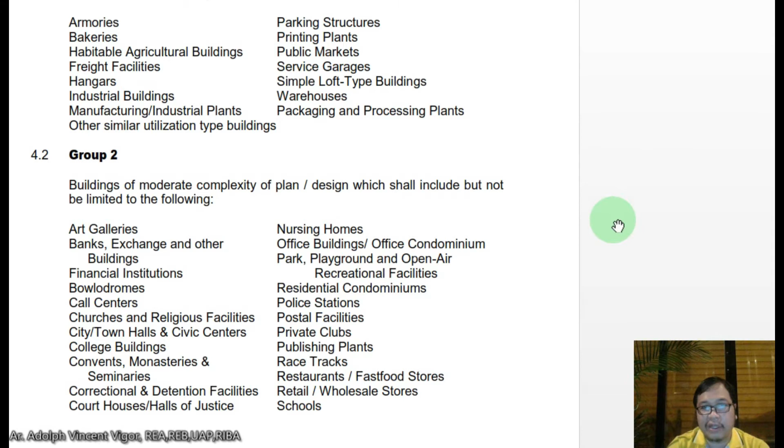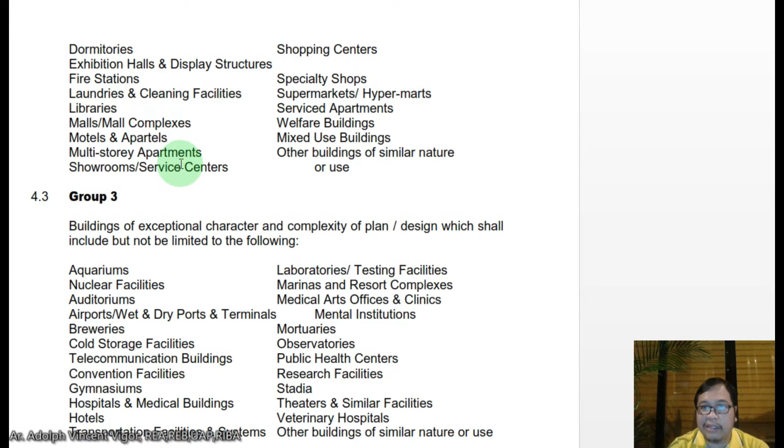Always remember group 1 is simple, group 2 is moderate. Let's move into group 3. You still have dormitories for group 2, exhibition, fire stations, libraries, malls, motels, multi-story apartments, shopping centers, shops, mixed-use buildings and welfare buildings, and other buildings of similar nature or use.

Now group 3 are buildings of exceptional character and complexity of plan and design, which shall include but not limited to the following: aquariums, nuclear facilities. If you're an architect and you already got involved in a nuclear facility project, that means you're really very good in terms of the technical aspects of architecture and engineering.

We have auditoriums, airports, breweries, cold storage facilities, telecommunications buildings, convention facilities, gymnasiums, hospitals, hotels, transport facilities, laboratories, marinas, medical offices, mortuaries, observatories, public health centers, research facilities, stadia, theaters, veterinary buildings, veterinary hospitals, and other buildings of similar use or nature.

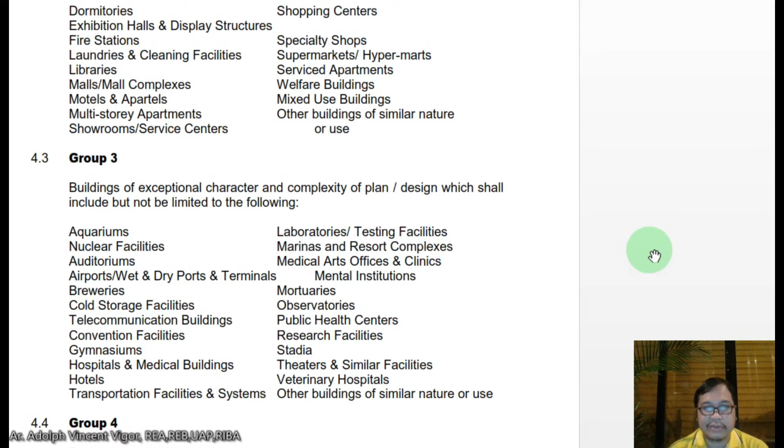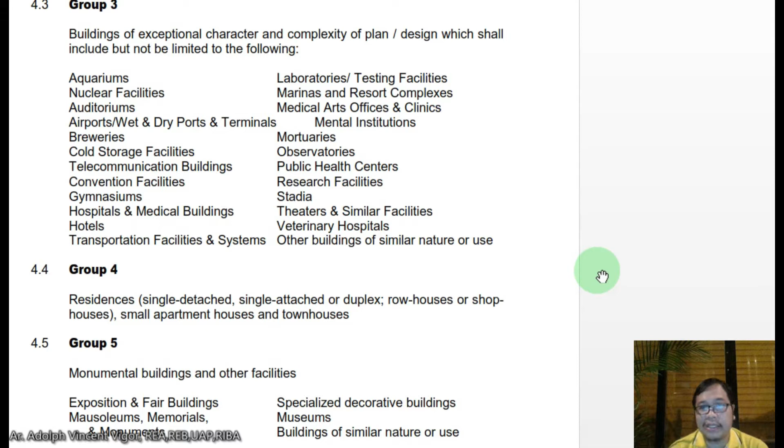Group 4 are your residences: single detached, single attached or duplex, row houses or shop houses, small apartment houses, and townhouses.

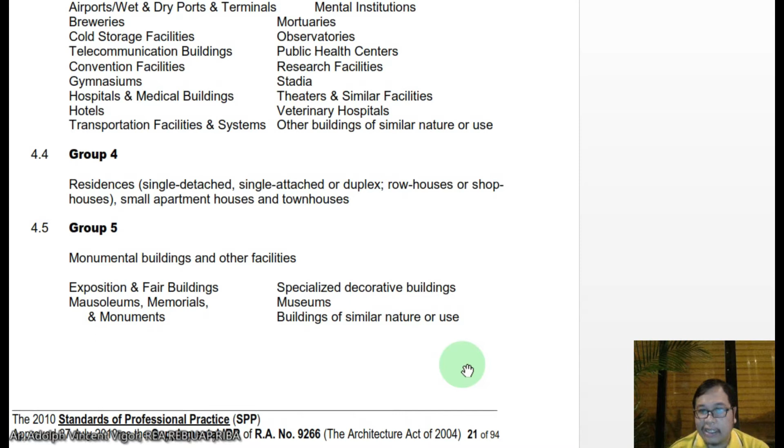We have group 5, which are the monumental buildings and other facilities such as exposition and fair buildings, mausoleums, memorials, monuments, specialized decorative buildings, museums, and buildings of similar nature or use.

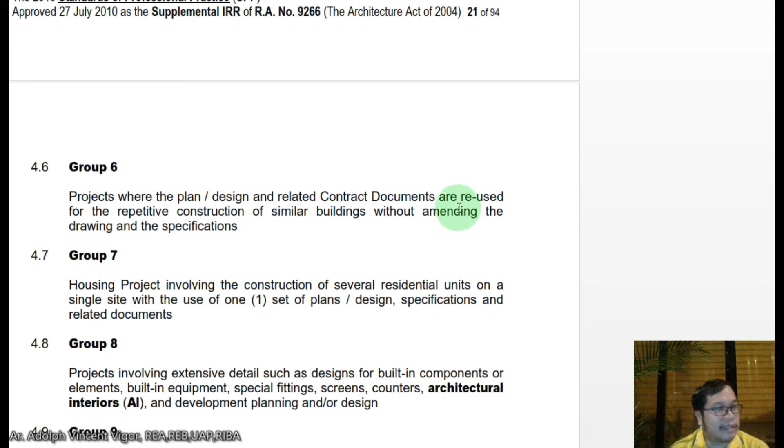We have group 6, which are projects where the plan, design, and related contract documents are reused for the repetitive construction of similar buildings without amending the drawings and specifications. There are cases like this, class, when your plan and design and also the related contract documents are used repeatedly in different sites.

Then we have group 7, for housing projects, which involves the construction of several residential units on a single site with the use of one set of plans, design specifications, and related documents.

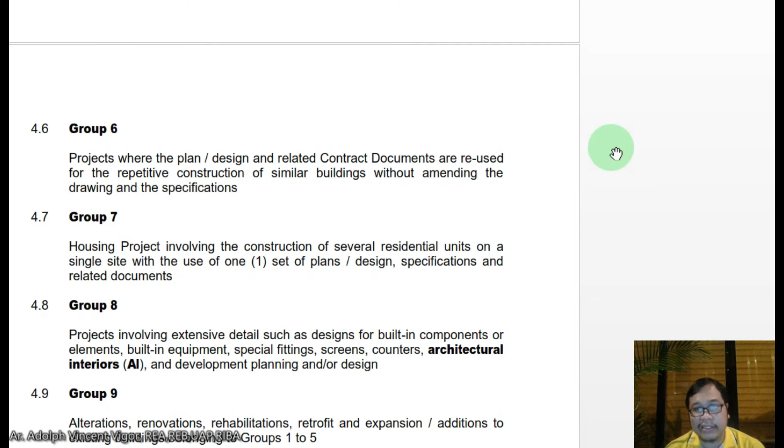We have group 8, which are projects involving extensive detailing such as designs for built-in components or elements, special fittings, screens, counters, architectural interiors, and development, planning, and/or design.

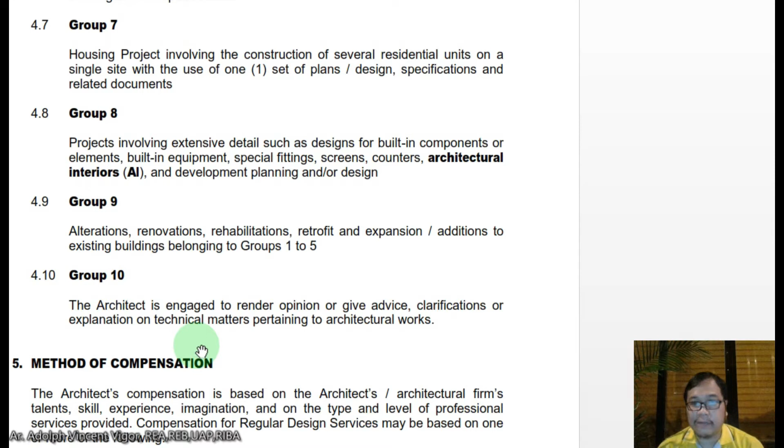You have group 9, which is alterations, renovations, rehabilitations, retrofit and expansion, additions to existing buildings belonging to groups 1 to 5. And group 10, which is opinion or advice, clarifications, or explanations on technical matters pertaining to architectural works.

Okay, now that we are done with that, let's move on to the method of compensation. Compensation is based on the architect's or architectural firm's talents, skills, experience, imagination, and on the type and level of professional services provided. So compensation for regular design services may be based on one or more of the following.

So why is it that there's this statement that our compensation is based on your experience, skills, imagination, talent, and the type and level of professional services provided? From my experience, class, in your first 10 years you really have to build a very strong portfolio. You need to expose yourself to different project types.

You need to move out of your comfort zone. That means you should experience not only doing residential buildings but other project types as well. It would be good for you once you get your license to not only focus here in Cagayan de Oro but move to bigger cities as well, so that you can experience how they build and how they design their buildings.

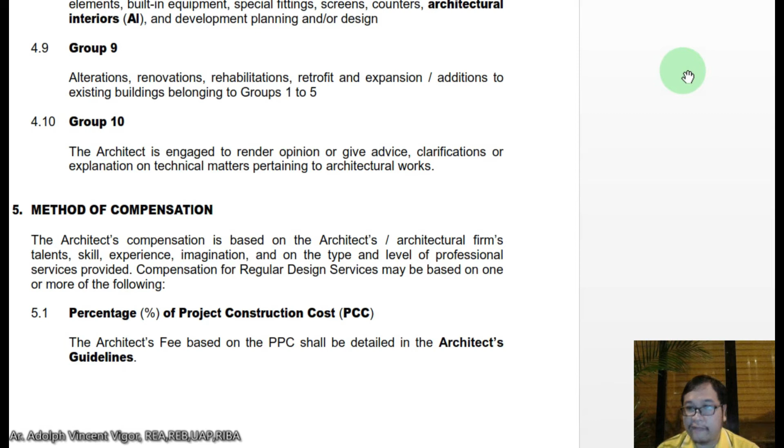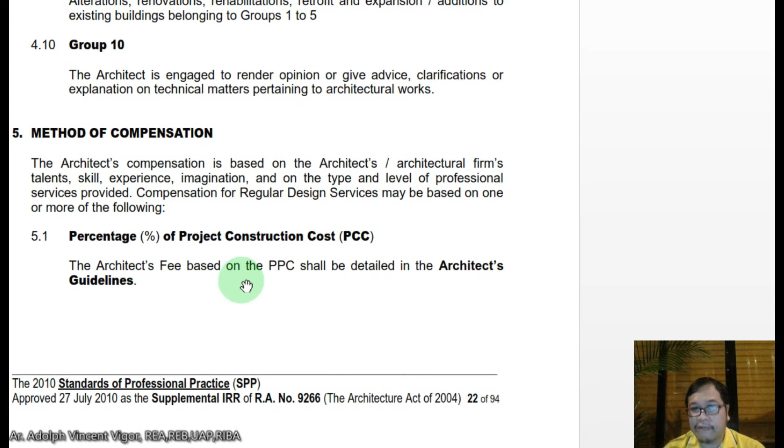So the methods of compensation: the first one is the percentage of project construction cost. The architect's fee based on the PPC shall be detailed in the architect's guidelines.

Then we have the multiple of direct personnel expenses. This cost-based method of compensation is applicable to non-creative works such as accounting, secretarial research, data gathering, preparation of reports, and the like. This method is based on technical hours spent and does not account for creative work, since the value of creative design cannot be measured by the length of time the designer spent on his work.

The computation is made by adding all costs of technical services, man-hours times rate, then multiplying it by a multiplier to cover overhead and profit. The multiplier ranges from 1.5 to 2.5, depending on the office setup, overhead, experience of the architect, and the complexity of the project.

Other items such as cost of transportation, living and housing allowances of foreign consultants, out-of-town living and housing allowances of local consultants, and the like are all to be charged to the client.

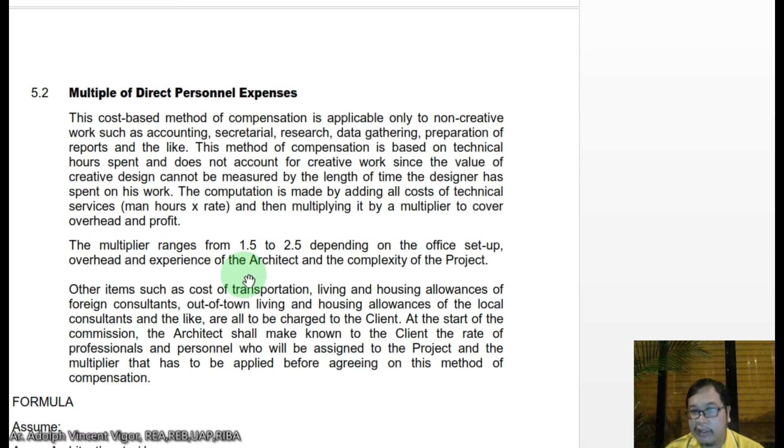At the start of the commission, the architect shall make known to the client the rate of professionals and personnel who will be assigned to the project, and the multiplier that has to be applied, before agreeing on the method of compensation. So this is the formula.

Assuming that A is equal to the architect's rate per hour, C is the consultant's rate per hour, and T is the rate per hour of technical staff, researchers, and others involved in the project. AN, CN, TN is the number of hours spent by the architect, consultants, and technical staff.

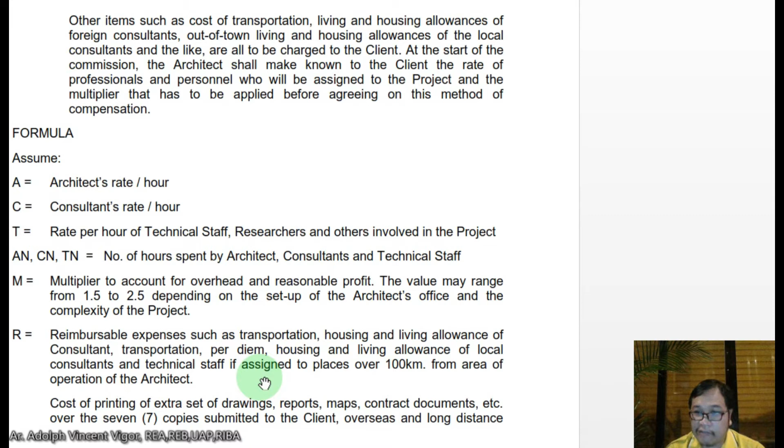M is the multiplier, 1.5 to 2.5, and R is the reimbursable expenses such as transportation, housing, living allowance of consultants, transportation per diem, housing and living allowance of local consultants, technical staff assigned to places over 100 kilometers from the area of operation of the architect.

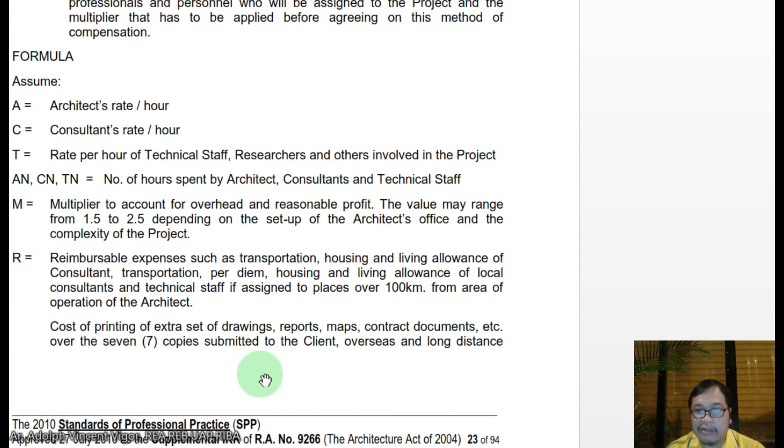So the cost of printing extra sets of drawings, reports, maps, contract documents over the 7 copies submitted to the client, overseas and long distance calls, technical and laboratory tests, licenses, fees, taxes, and similar cost items related to the project.

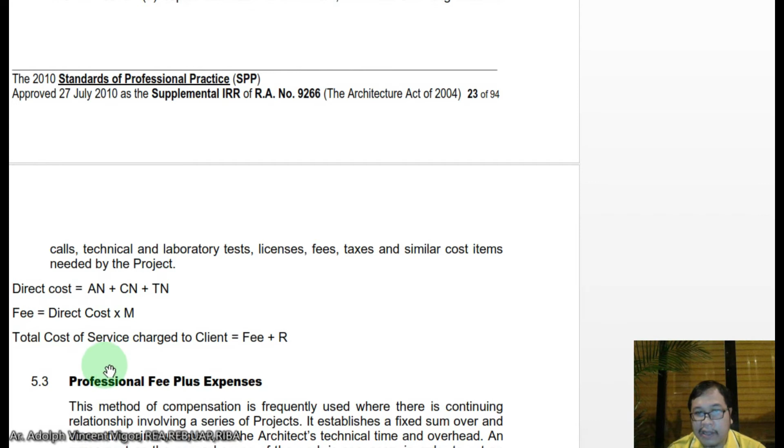So the direct cost is AN plus CN plus TN. Then the fee is the direct cost multiplied by M, the multiplier. The total cost of service to the client is equal to the fee plus R. Then you also have the professional fee plus expenses.

This method of compensation is frequently used where there is a continuing relationship involving a series of projects. It establishes a fixed sum over and above the reimbursement for the architect's technical time and overhead. An agreement on the general scope of the work is necessary in order to set an equitable fee.

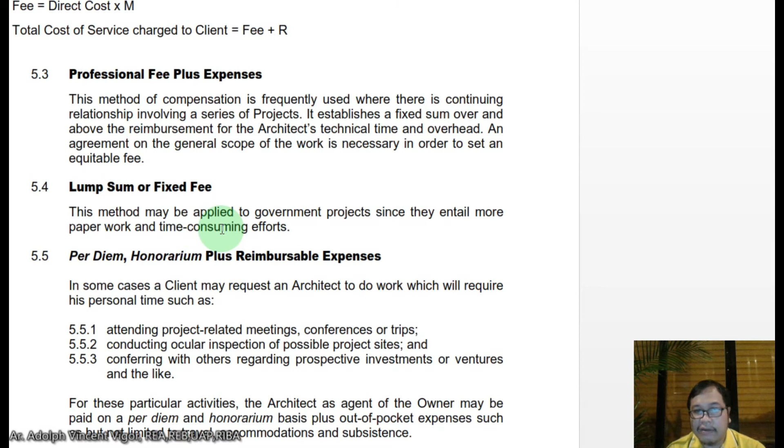Then you have the lump sum or fixed fee. This method may be applied to government projects since they entail more paperwork and time-consuming efforts.

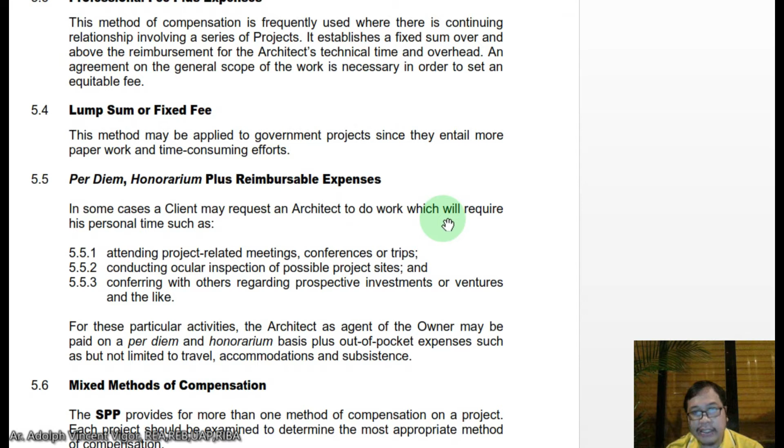You have the per diem, honorarium, plus reimbursable expenses. In some cases, a client may request an architect to do work requiring his personal time, such as attending project-related meetings, conducting ocular inspections, conferring with others regarding prospective investments or ventures, and the like. For these activities, the architect, as agent of the owner, may be paid on a per diem and honorarium basis plus out-of-pocket expenses such as, but not limited to, travel, accommodations, and subsistence.

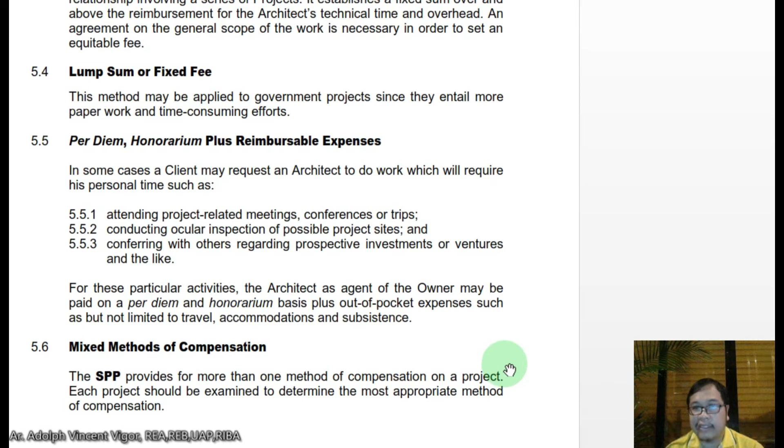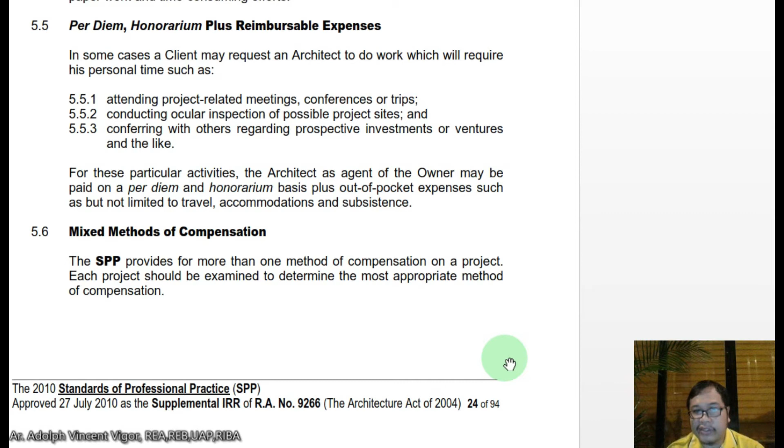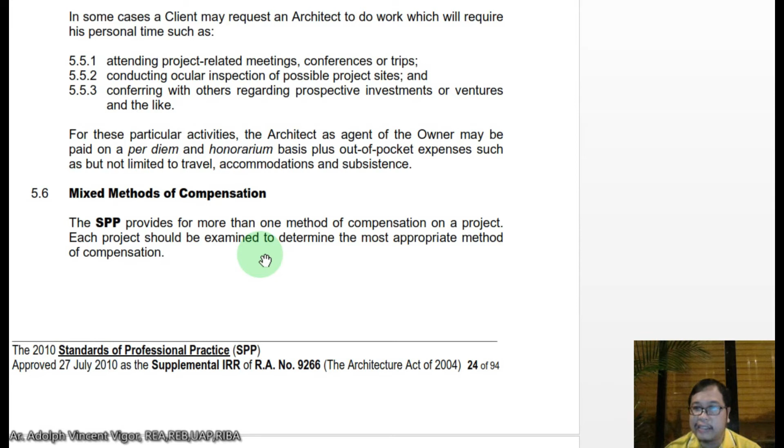Then we also have the mixed method of compensation. The SPP provides more than one method of compensation per project, so each project should be examined to determine the most appropriate method of compensation. It's really up to you, class, on the type of compensation for a certain project. You can mix these things, whatever you think is equitable for you, and whatever the client will agree upon.

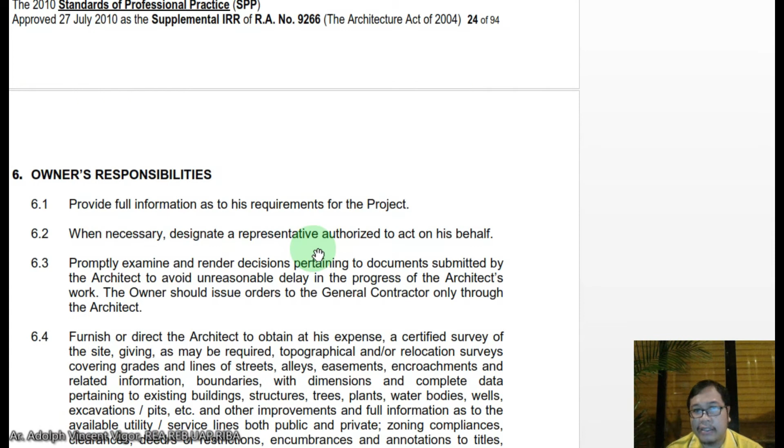These are the owner's responsibilities: to provide full information on the requirements of the project; when necessary, designate a representative authorized to act on its behalf; promptly examine or decide on documents submitted by the architect to avoid unreasonable delay in the progress of the architect's work; and the owner should issue orders to the general contractor only through the architect.

So this clause, the owner's responsibilities, please familiarize yourselves with it and include it in your service contracts with the owner, and explain to them what their responsibilities are as well.

Furnish or direct the architect to obtain at his expense a certified survey of the site as may be required, topographical and relocation surveys covering grades and lines of streets, alleys, easements, encroachments, and related information, boundaries with dimensions, and complete data pertaining to existing buildings, structures, trees, plants, water bodies, wells, excavations, pits, etc., and other improvements, and full information as to the available utility service lines, both public and private, zoning compliances, clearances, deeds of restrictions, encumbrances, and annotations to the titles, association guidelines and standards, and soil investigations, tests, borings and test pits necessary to determine soil and subsoil conditions.

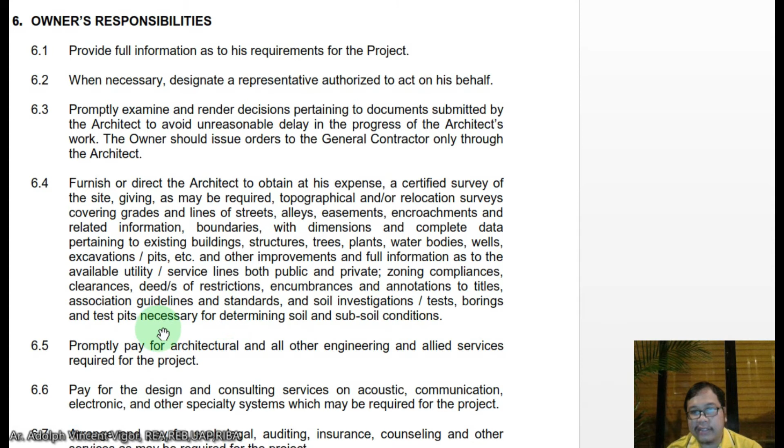Promptly pay for architectural and all other engineering and allied services required for the project, pay for the design and consulting services on acoustic, communication, electronic, and other specialty systems which may be required for the project, arrange and pay for such legal, auditing, insurance, counseling, and other services as may be required, pay for all reimbursable expenses incurred as called for in Section 7, and all taxes including VAT but not including income tax that the government may impose on the architect as a result of services rendered, whether performed as a natural person, an individual practitioner, or as a juridical entity, sole proprietorship, partnership, or corporation.

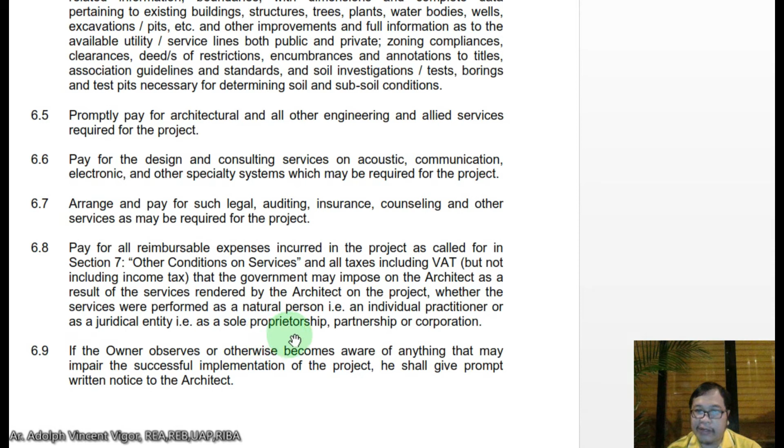And if the owner observes or otherwise becomes aware of anything that may impair the successful implementation of the project, he shall give prompt written notice to the architect.

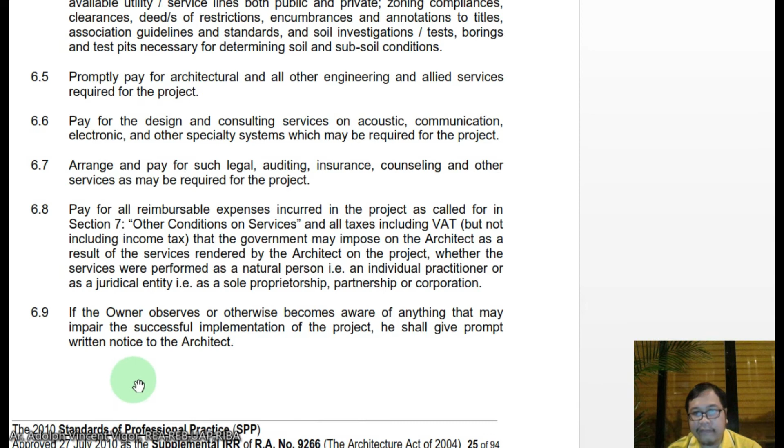Okay, so the other conditions on services. The conditions for the architect's fee are that the architect's fee is based on the project construction cost, and where the architect has to render additional services, additional compensation shall be required.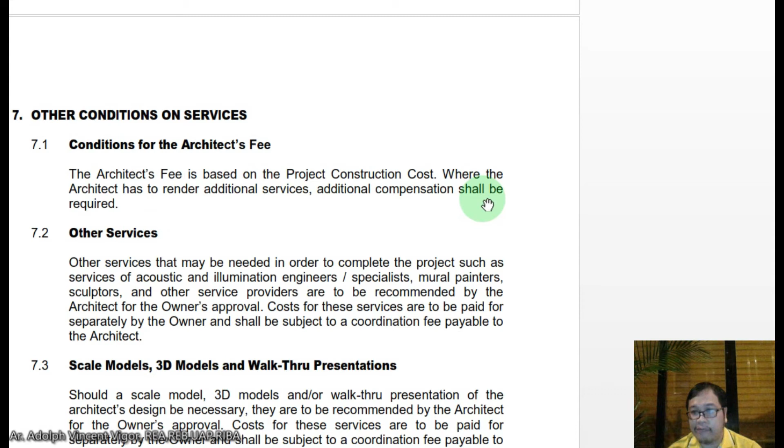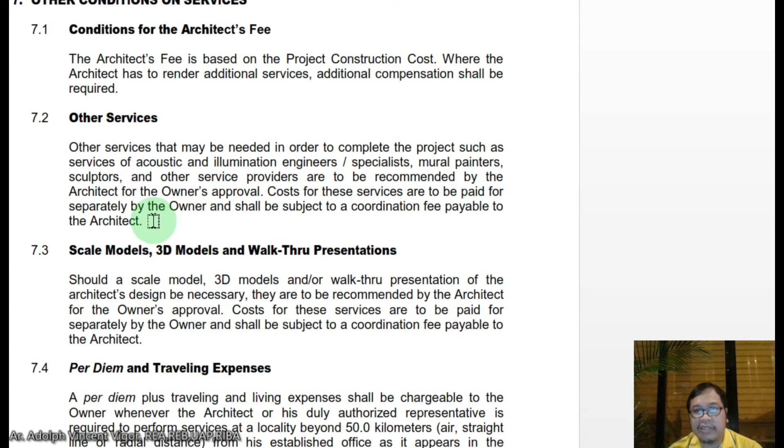Other services may be needed to complete the project, such as services of acoustic and illumination engineers, specialists, mural painters, sculptors, and other service providers, to be recommended by the architect for the owner's approval. Costs for these services are to be paid for separately by the owner and shall be subject to a coordination fee payable to the architect.

Scale models, 3D models, and walkthrough presentations. Should the scale model, 3D model, and/or walkthrough presentation of the architect's design be necessary, they are to be recommended by the architect for the owner's approval. Costs for these services are to be paid for separately by the owner and shall be subject to a coordination fee payable to the architect.

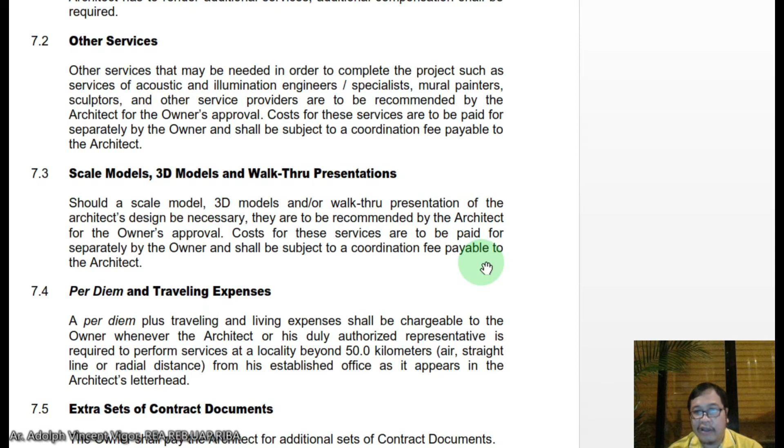The per diem and traveling expenses: a per diem plus traveling and living expenses shall be chargeable to the owner whenever the architect or his duly authorized representative is required to perform services at a locality beyond 50 kilometers from his established office as it appears in the architect's letterhead.

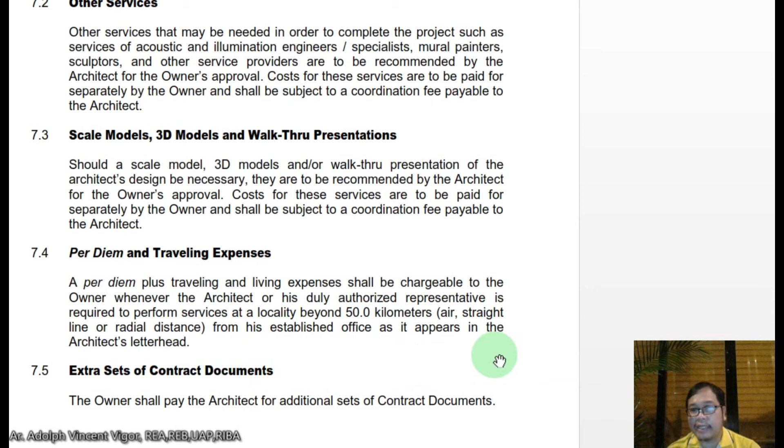Then you also have the extra sets of contract documents. The owner shall pay the architect for additional sets of contract documents.

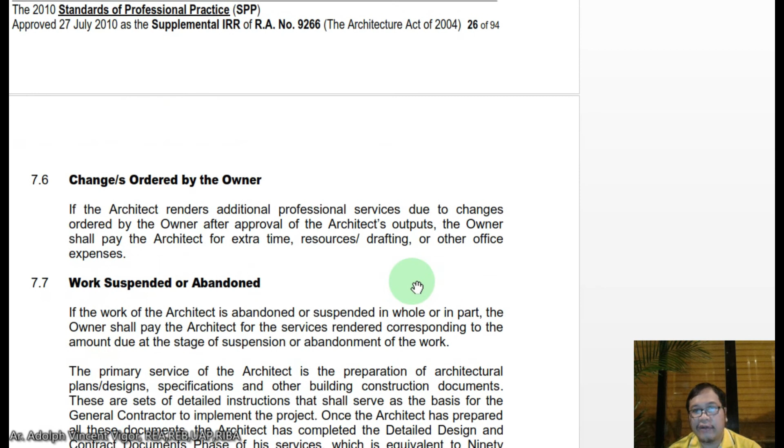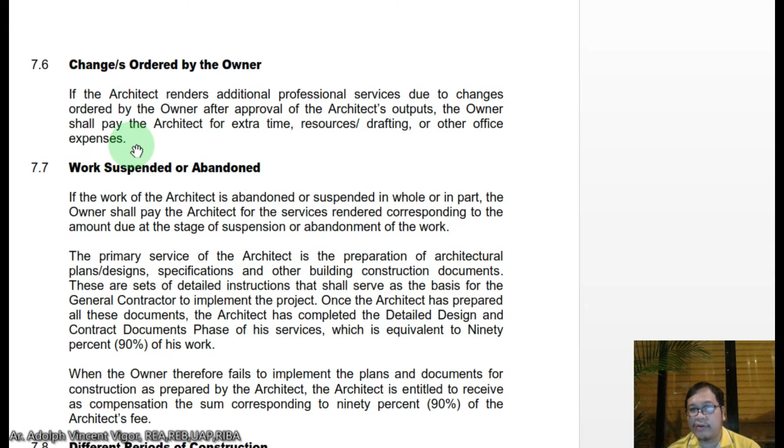And you also have the change order by the owner. The architect renders additional professional services due to changes ordered by the owner after approval of the architect's output. The owner shall pay the architect for extra time, resources, drafting, or other office expenses. So I think this is only fair. If you already agreed upon a certain project and it's already approved, then the owner decides to add some more, so of course the owner should pay for it.

Then, work suspended or abandoned: if the work of the architect is abandoned or suspended in whole or in part, the owner shall pay the architect for the services rendered corresponding to the amount due at the stage of suspension or abandonment of the work.

The primary service of the architect is the preparation of architectural plans, designs, specifications, and other building construction documents. These are sets of detailed instructions that shall serve as the basis for the general contractor to implement the project. So once the architect has prepared all these documents, the architect has completed the detailed design and contract documents phase of his services, which is equivalent to 90% of his work.

So when the owner fails to implement the plans and documents for construction as prepared by the architect, the architect is entitled to receive compensation, the sum corresponding to 90% of the architect's fee.

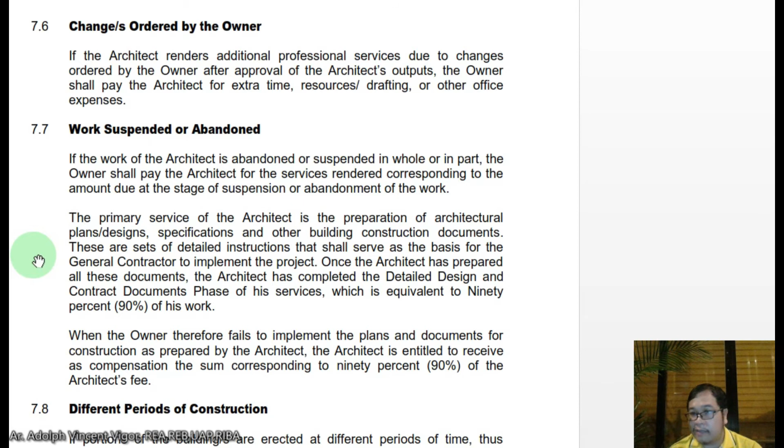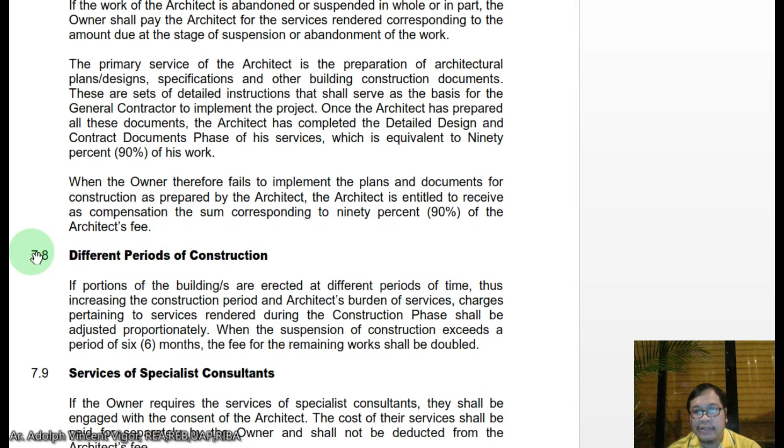For different periods of construction: if portions of the buildings are erected at different periods of time, thus increasing the construction period and the architect's burden of services, charges pertaining to services rendered during the construction phase shall be adjusted proportionately. When the suspension of construction exceeds a period of 6 months, the fee for the remaining works shall be doubled.

Then the services of specialist consultants: if the owner requires the services of specialist consultants, they shall be engaged with the consent of the architect. The cost of their services shall be paid for separately by the owner and should not be deducted from the architect's fee.

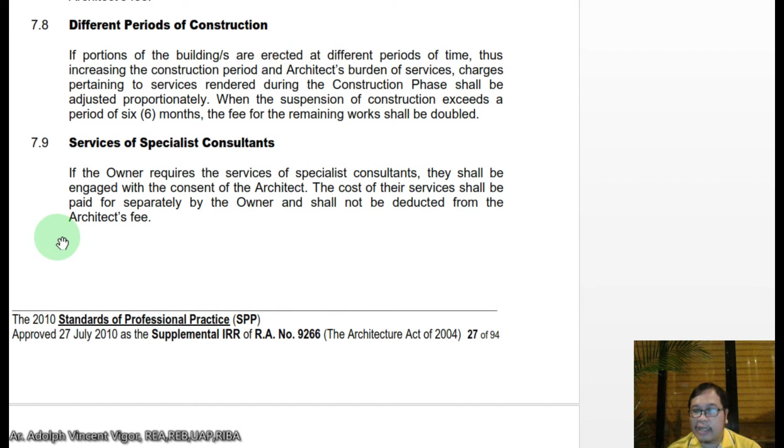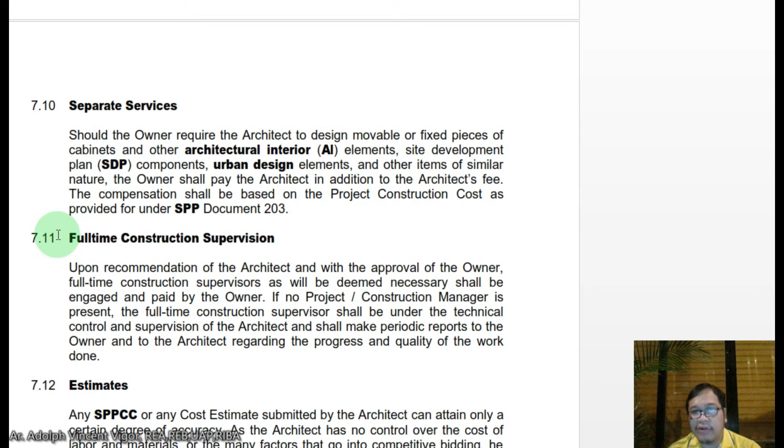And for separate services, should the owner require the architect to design movable or fixed pieces of cabinets and other architectural interior elements, site development plan components, urban design elements, and other items of similar nature, the owner shall pay the architect in addition to the architect's fee. The compensation shall be based on the project construction cost as provided under SPP document 203.

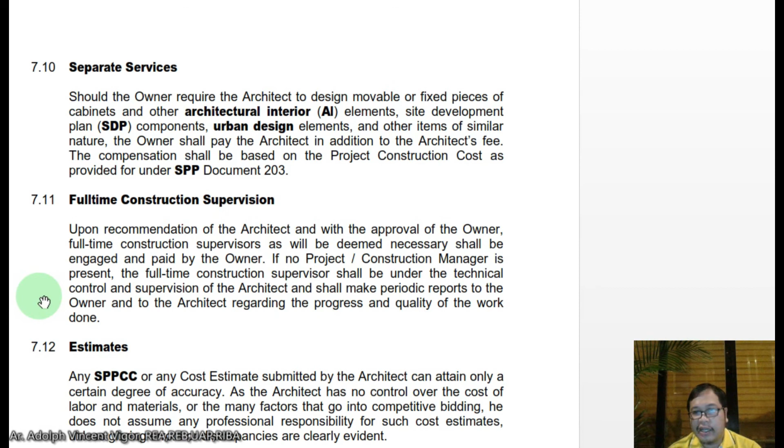For full-time construction supervision, upon recommendation of the architect and with the approval of the owner, full-time construction supervisors as deemed necessary shall be engaged and paid by the owner. If no project or construction manager is present, the full-time construction supervisor shall be under the technical control and supervision of the architect and shall make periodic reports to the owner and architect regarding the progress and quality of the work done.

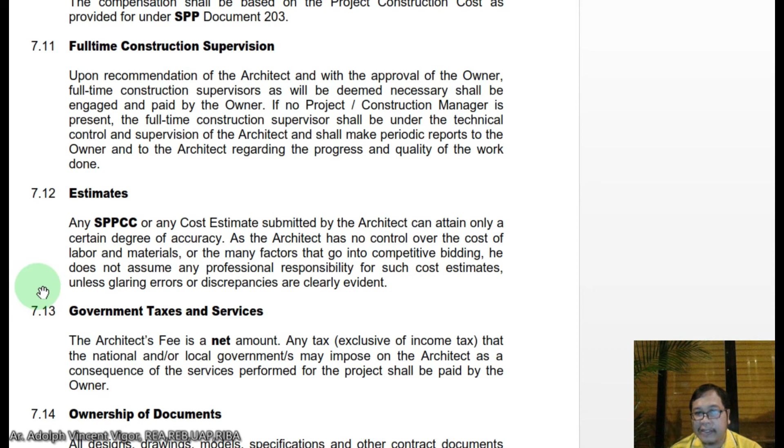The estimates, any SPPCC or cost estimate submitted by the architect, can attain only a certain degree of accuracy. As the architect has no control over the cost of labor and materials or the factors that may go into competitive bidding, he does not assume any professional responsibility for such cost estimates unless glaring errors or discrepancies are clearly evident.

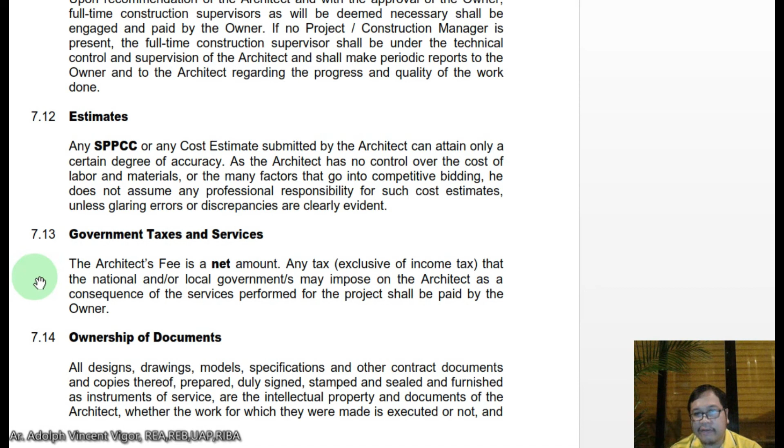The architect's fee is a net amount. Any tax, exclusive of income tax, that the national and/or local governments may impose on the architect as a consequence of the services performed for the project shall be paid by the owner.

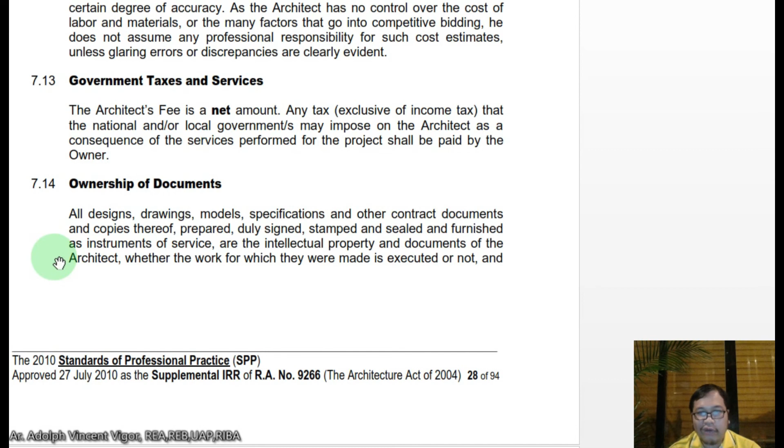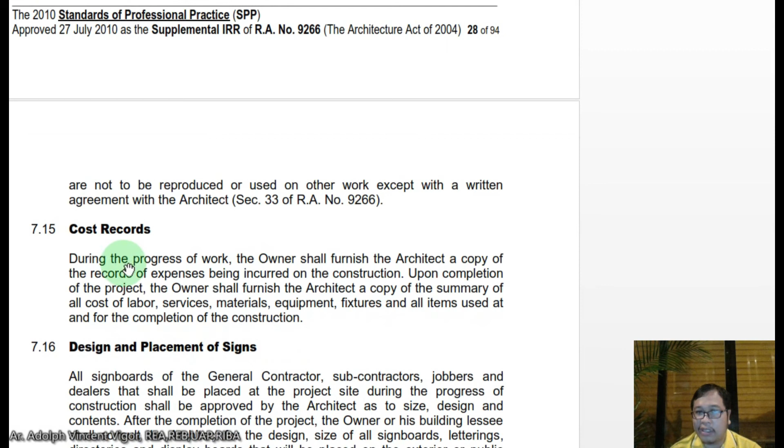Ownership of documents: all designs, drawings, models, specifications, other contract documents, and copies thereof, prepared, duly signed, stamped, and sealed, and furnished as instruments of service, are the intellectual property and documents of the architect, whether the work for which they were made is executed or not, and are not to be reproduced or used on other work except with written agreement with the architect. This is in Section 33 of RA 9266.

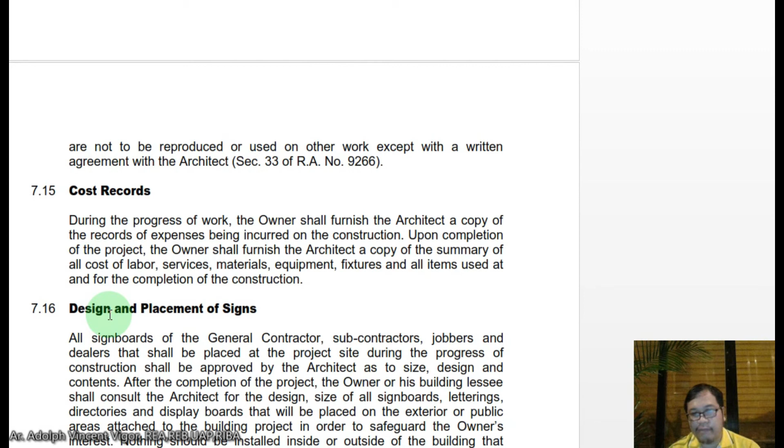For cost records, during the progress of work the owner shall furnish the architect a copy of the records of expenses being incurred in the construction. Upon completion of the project, the owner shall furnish the architect a copy of the summary of all costs of labor, services, materials, equipment, fixtures, and all items used for the completion of the construction.

For the design and placement of signs, all signboards of the general contractors, subcontractors, jobbers, and dealers that may be placed at the project site during construction shall be approved by the architect as to size, design, and contents. After completion of the project, the owner or his building lessee shall consult the architect for the design and size of all signboards, letterings, directories, and display boards that will be placed on the exterior or public areas attached to the building project.

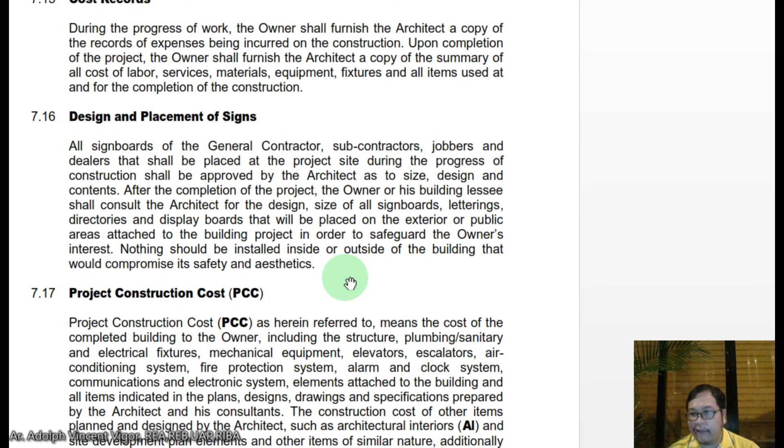In order to safeguard the owner's interest, nothing shall be installed inside or outside the building that would compromise its safety and aesthetics. So let's go to the project construction cost.

The project construction cost, as herein referred to, means the cost of the completed building to the owner, including the structure, plumbing, sanitary and electrical fixtures, mechanical equipment, elevators, escalators, air conditioning system, fire protection system, alarm and clock system, communications and electronic system, elements attached to the building, and all items indicated in the plans, designs, drawings, and specifications prepared by the architect and his consultants.

The construction cost of other items planned and designed by the architect, such as architectural interiors and site development plan elements, and other items of similar nature additionally planned and designed by the architect, are also part of the PCC. So the cost of materials used and the labor for installation are part of the PCC.

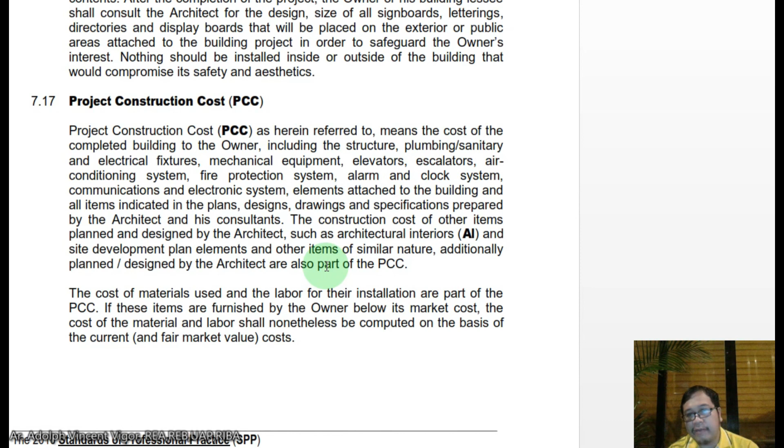If these items are furnished by the owner below its market cost, the cost of the material and labor shall nonetheless be computed on the basis of the current and fair market value cost. The PCC does not include any of the fees for the architect, the engineer, the specialist consultants, and salaries of the construction inspectors. This is important to note, class, especially in your contracts.

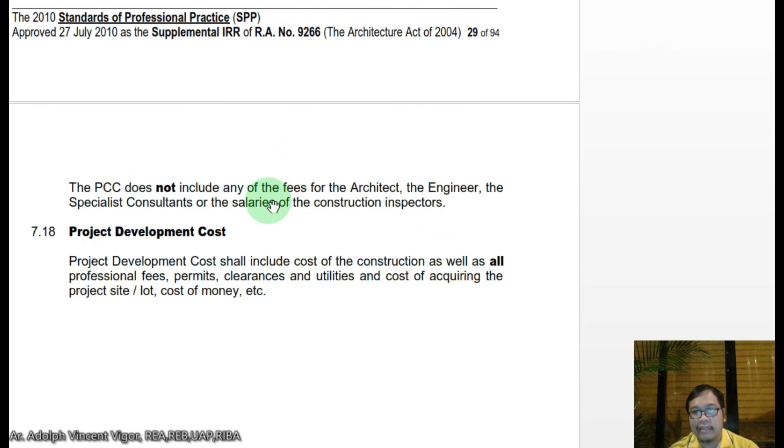So if the building costs around 10 million or 20 million, it does not include the fee. The fee is separate from it. It's important that you explain that to your client at the earliest possible time.

Then the project development cost. Project development costs include the cost of construction as well as all professional fees, permits, clearances, utilities, and cost of acquiring the project site, lot, cost of money, etc.

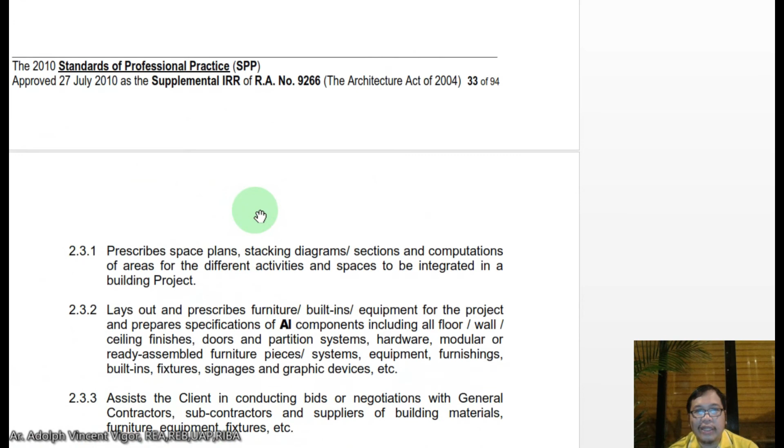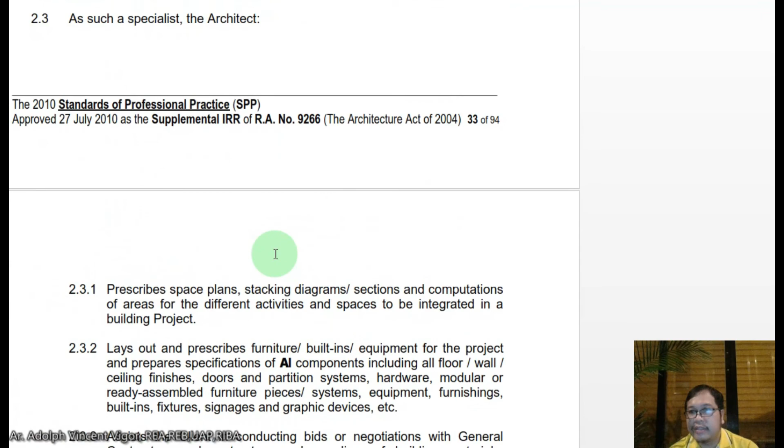I think the first ten years of your career, after passing the board exam, some of you might find it quite hard to be frank with the client regarding your professional fees. But you really have to learn how to present yourself and how to show your worth for the project.